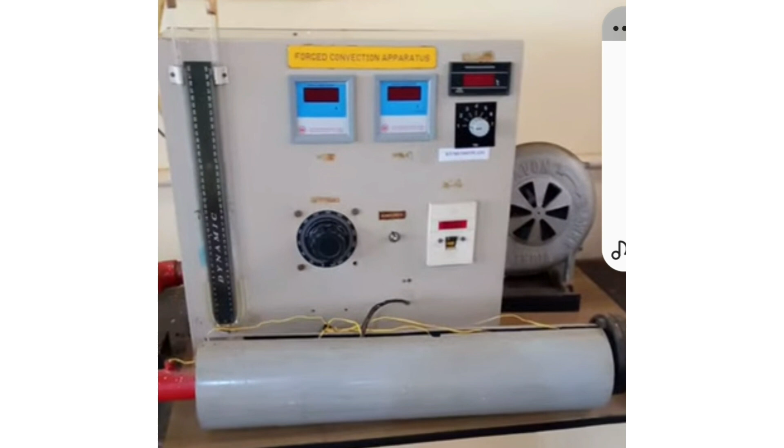Forced convection apparatus. In the previous class, we conducted the free convection experiment and found the heat transfer coefficient value in the case of free convection. So here, we are going to find out the heat transfer coefficient in forced convection, where the fluid flows through a pipe. So the aim is to determine the heat transfer coefficient in forced convection, fluid flow through a pipe. Okay.

To conduct this experiment, first we are going to see the specification. Diameter of the orifice is 0.02 meter, test section length of the pipe is 0.5 meter, diameter of the pipe is 0.032 meter, coefficient of discharge 0.64, there is no unit. Dimmerstat range is 260 volt and 2 ampere, voltmeter maximum is 300 volt, ammeter maximum is 2 ampere, and the number of thermocouples is 7.

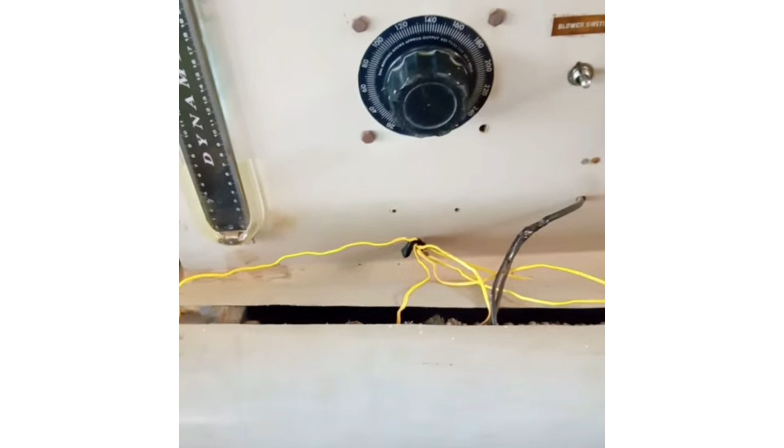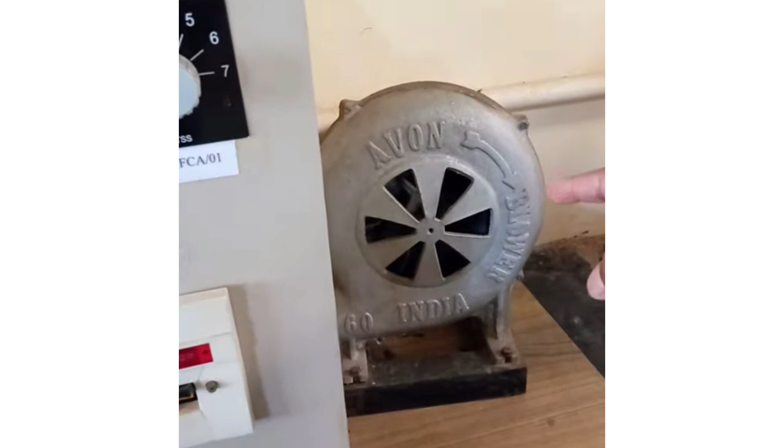If you come to the setup, we are going to consider a horizontal pipe. Inside of this pipe the fluid is flowing. If you come near, you can observe. This is the test pipe. As we consider forced convection, we use an external agency to get forced air over the heated surface area, that is a blower. From this blower we get forced air, which circulates inside of this test pipe. This is the test section.

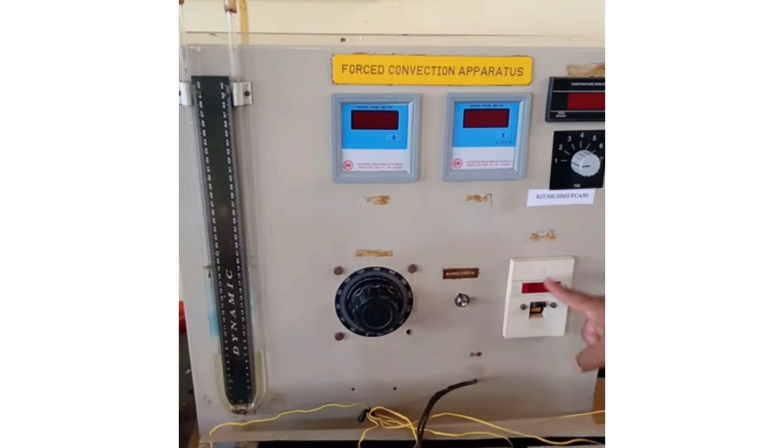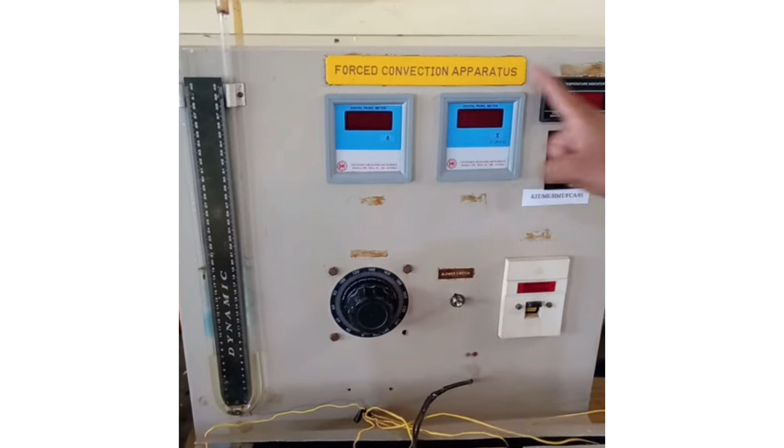If we come to the control panel, we can observe this is the power switch, this is the blower switch, this is the dimmerstat voltage controller. This is a voltmeter, this is an ammeter. This is a temperature indicator; operating this temperature knob we can observe the temperatures. This is a U-tube manometer. We can note down the readings H1 and H2 from this U-tube manometer.

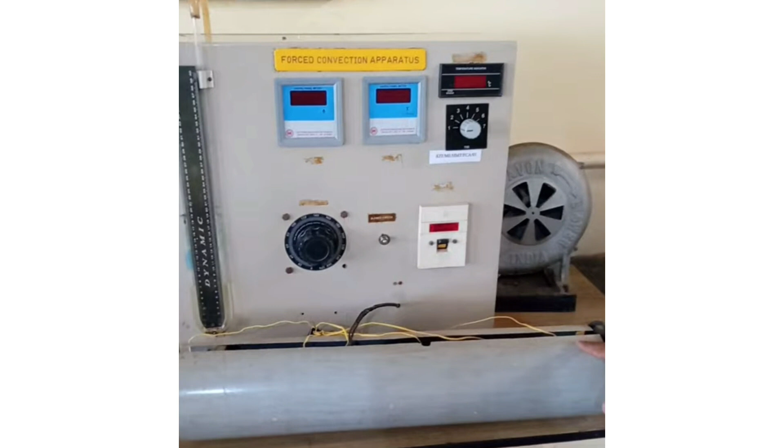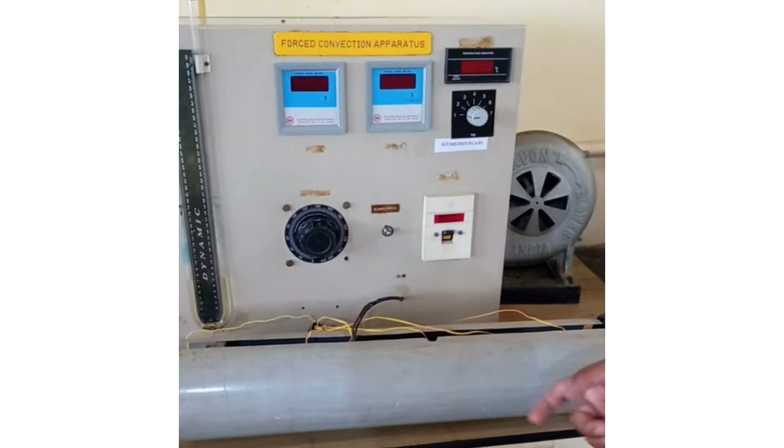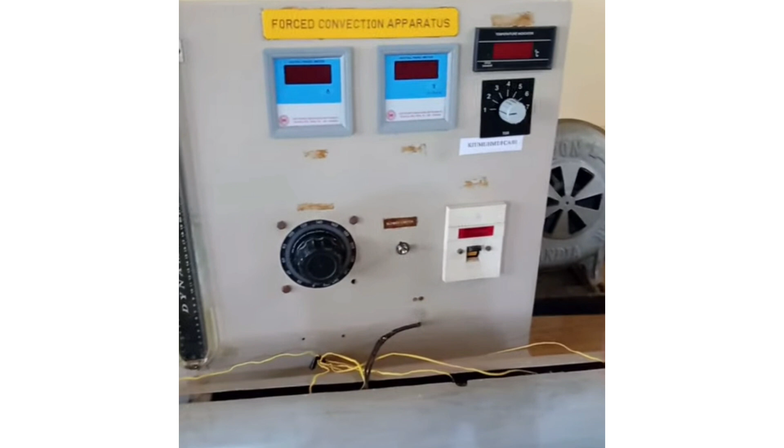So here we can observe this is the blower, from which we get the forced air. This is the length of the horizontal pipe. For this pipe we consider a heating coil, therefore the tube is heated, and the air is also heated when it circulates inside the pipe. To measure the surface temperature of the pipe, around 5 thermocouples are placed over the surface of the pipe. These are all the thermocouple wires.

Before the fluid enters the test pipe, we consider 1 thermocouple, and after the test pipe, 1 more thermocouple. For our reference, this we consider as T1, the fluid entering temperature, and this we say is the fluid exit temperature. The remaining temperatures are the surface temperatures of the pipe. Okay.

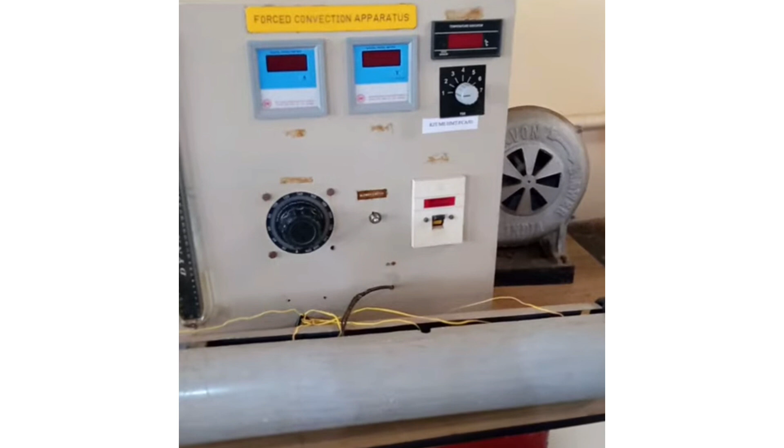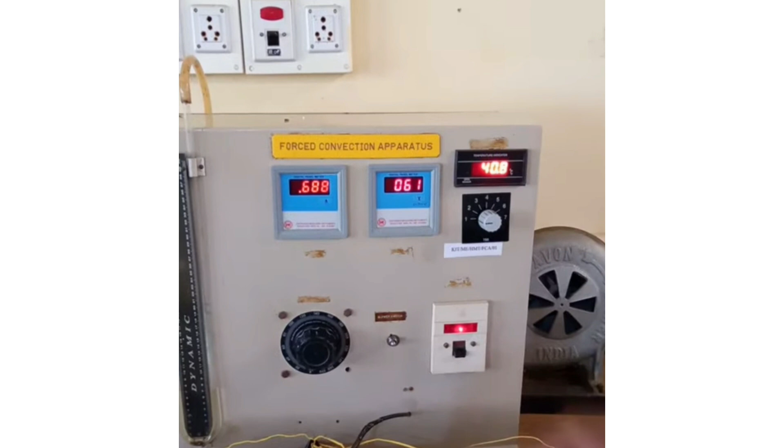Initially we switch on the mains. After switching on, we set the voltage by operating this voltage controller. We already set 60 volt. Based on the voltage, it shows the current reading. As the voltage is set, heat is supplied to this pipe. To avoid heat interaction with the surroundings, we provide insulation; we place cotton thread to avoid heat interaction with the surroundings.

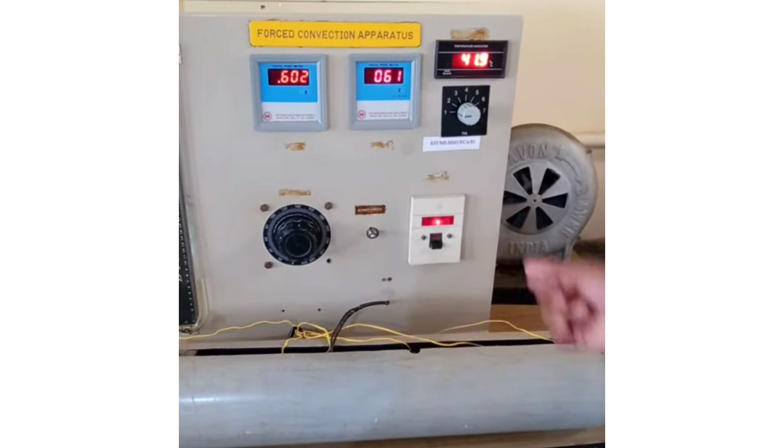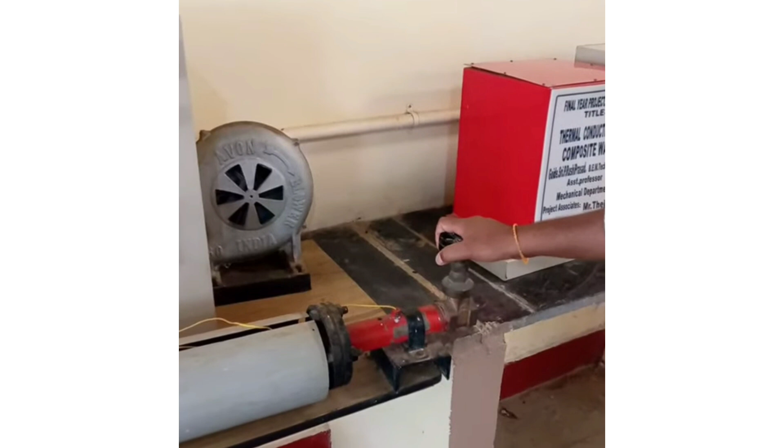So next thing is, we are going to switch on the blower. Before switching on the blower, you just adjust the valve. You just consider different trials. For the first trial, you just consider it as fully open. Next is partially open, 50% open, 25% open. Like that, we can consider different sets of trials. For the first trial, you just consider this valve fully open.

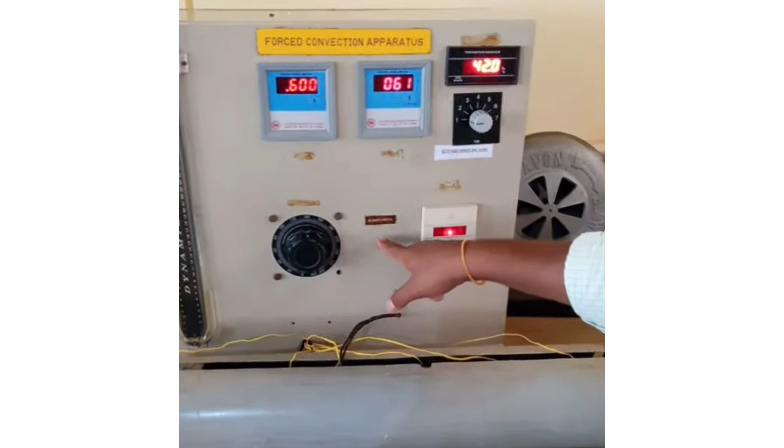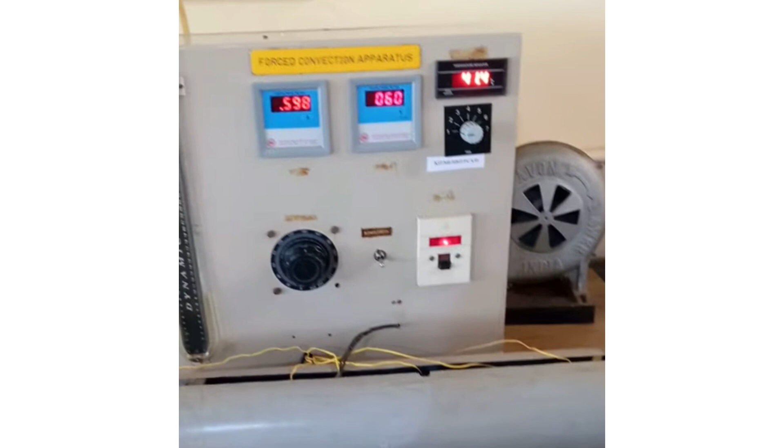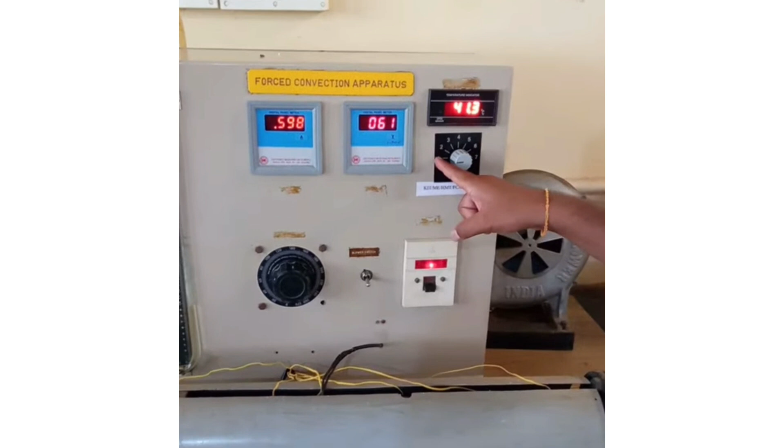Next, you switch on the blower. When you switch on the blower, from the blower we will get the forced air, and the forced air is circulated inside the pipe. Next, we are going to note down the temperatures. When the temperature reaches steady state, we are going to observe the temperatures T1 and T7, which indicate the fluid entering temperature and fluid exit temperature. T2 to T6 represent the surface temperature.

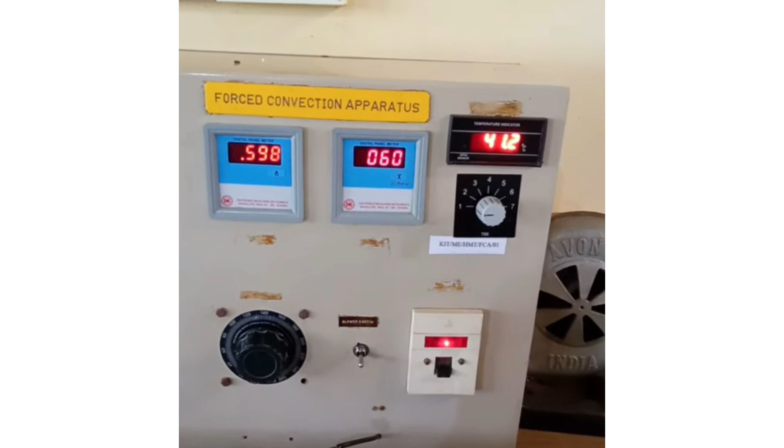So you are going to wait to reach the steady state. Steady state means temperature does not vary with respect to time. During that time, you are going to note down the temperatures. T1, that is the fluid entering temperature. T2, surface temperature. T3, surface temperature. T4, surface temperature, at different positions. At uniform distance we place the thermocouples to measure surface temperature. T4, T5, T6, and T7.

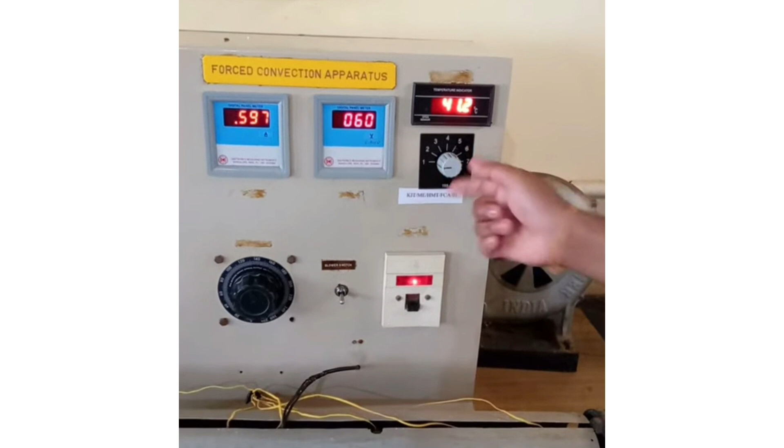T7, it says what? One second. T7 is the fluid exit temperature. The fluid exit temperature is more than the fluid entering temperature, because the fluid catches the heat from the tube, the heated surface. Therefore, at the exit point, we get the maximum temperature. As we can observe, T7 is 46. If you observe T1, what is T1? 41. Compared to T7, T1 is less, because the fluid carries heat from the heated surface area.

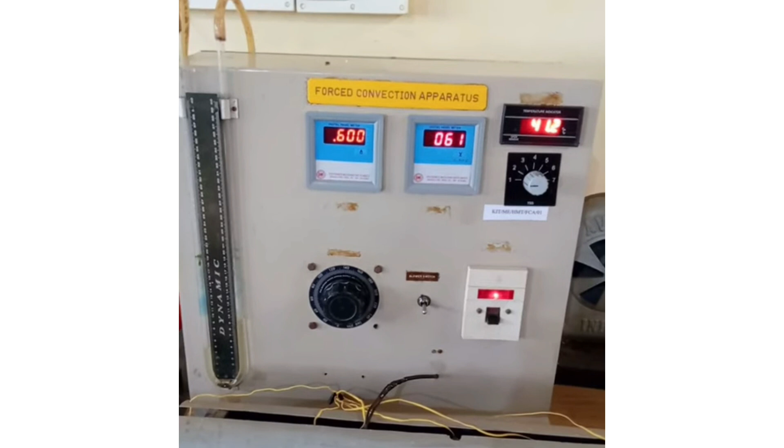From the tube. After noting down the voltage, current and temperatures, you are going to note down the H1 and H2 values. Observe the left limb and right limb. You note down H1 and H2 to find out the velocity of the air. From that velocity of air, we can find the Reynolds number. From the Reynolds number, we can decide the type of flow. Based on the Nusselt equation, we can find the heat transfer coefficient. The h value, theoretical and experimental, we can find out.

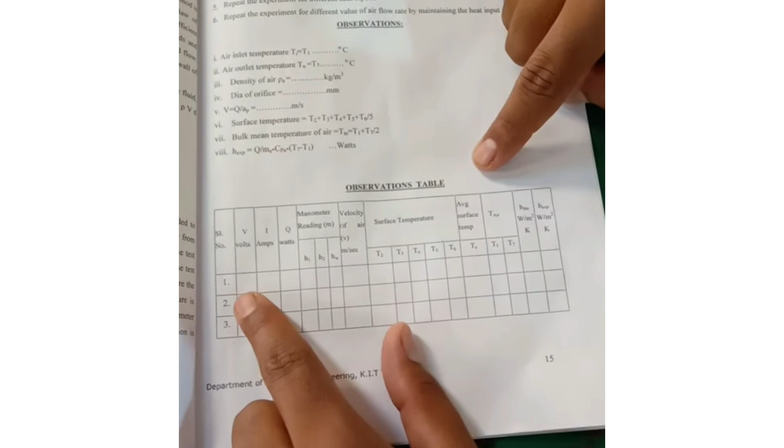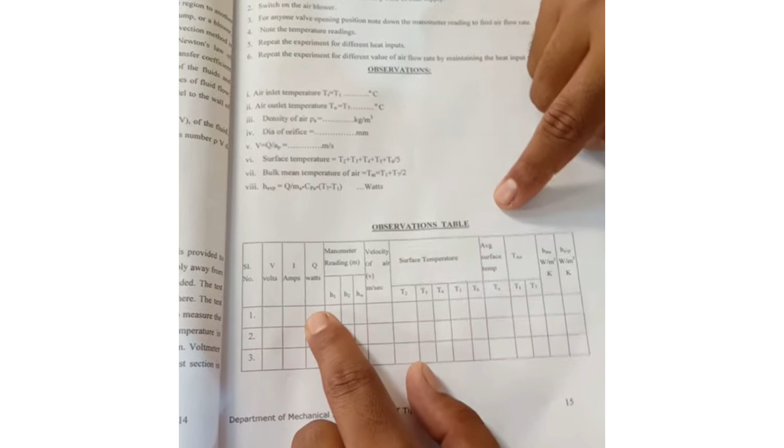This is the observation table. You just note down the voltage. As we set the voltage around 60 volts, based on the voltage it shows the current reading. Based on this, we get the amount of heat supplied. After setting the voltage, you wait to reach the steady state. Consider forced air: when you switch on the blower, you get the forced air, which is circulated inside the pipe.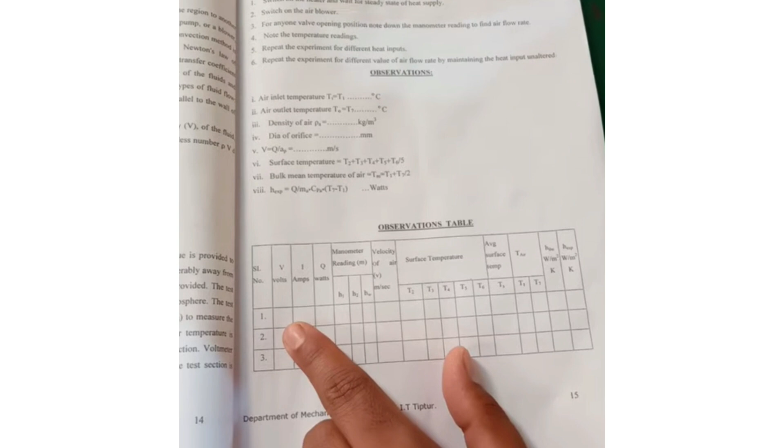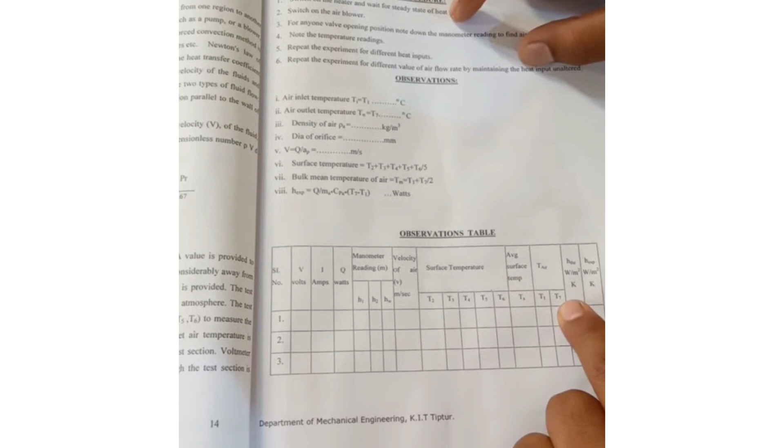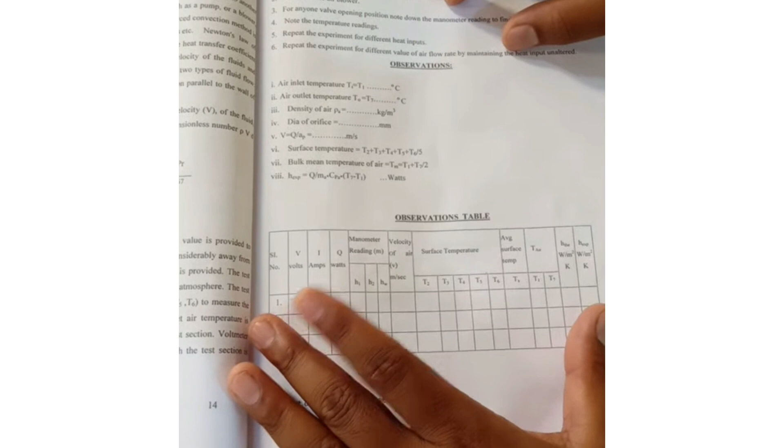After that, you note down the surface temperatures, the fluid entering temperature T1, and the fluid exit temperature T7. From the surface temperatures, we find the average surface temperature, and you note down the manometer readings to find the velocity of air. By knowing all these values, we can find the theoretical heat transfer coefficient and experimental heat transfer coefficient.

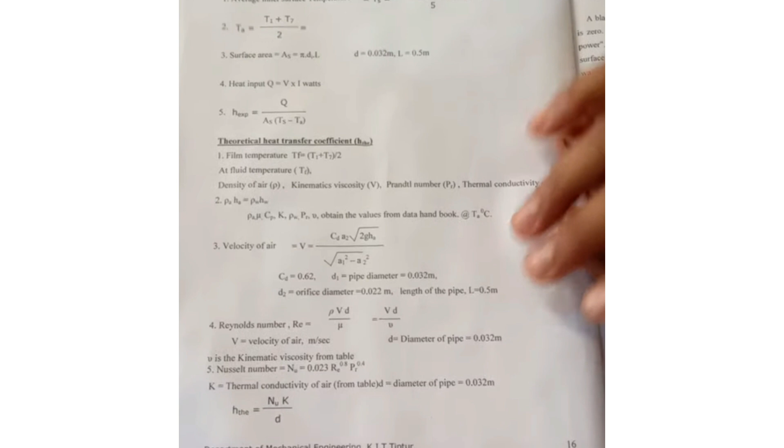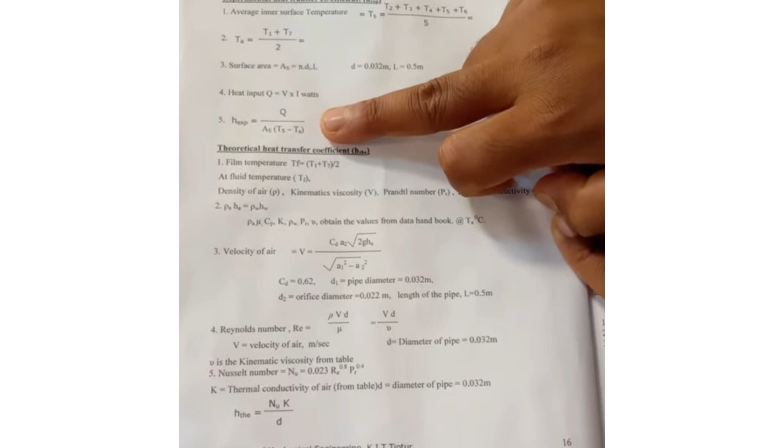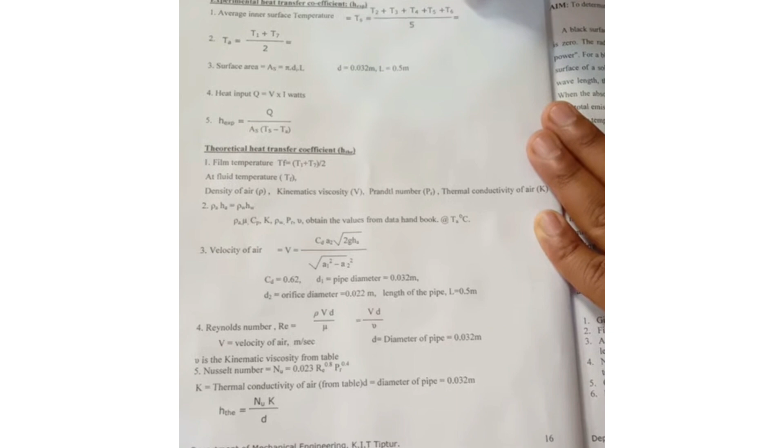Next is the calculation procedure. These are some important formulas to find the heat transfer coefficient, the experimental value and theoretical value. To find the heat transfer coefficient experimentally, we use the convective cooling law equation, Q = hAΔT. Using this equation, we can find the experimental h value. As we know the surface temperatures, we can take the average.

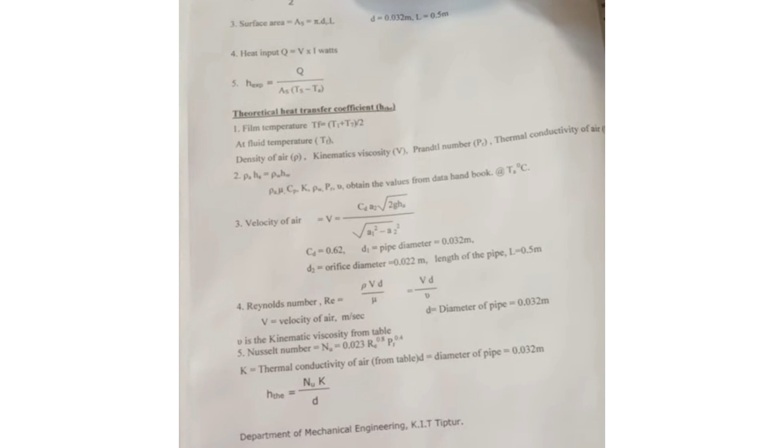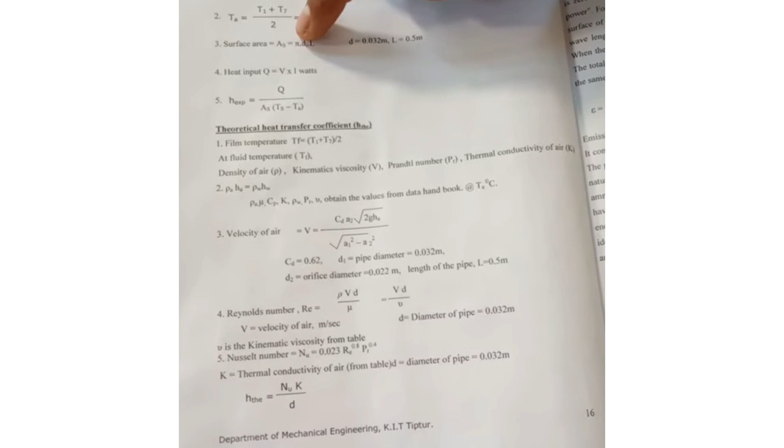Okay, from that we can get the fluid temperature. We are going to take the average of the fluid entering and fluid exit temperatures divided by 2. From this, we will get the difference in temperature, and we are going to find out the surface area of the tube or pipe, right? We are going to consider the formula pi DL, or we can consider 2 pi RL. As we know the diameter and the length, we can easily find out the area.

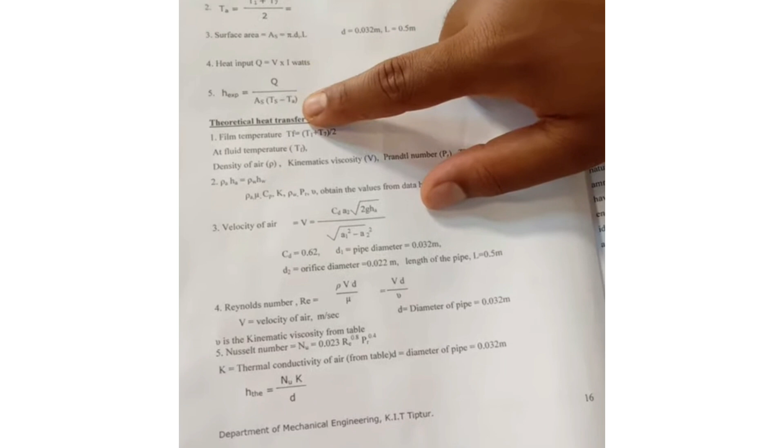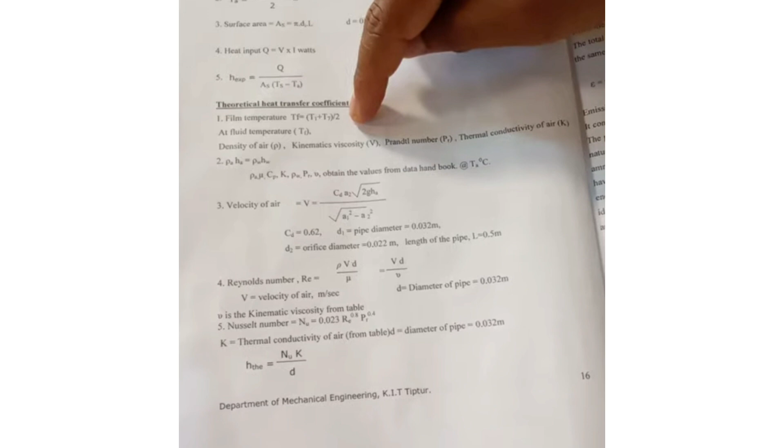As we can find out the amount of heat supplied, from this we can find out the H experimental value. If we come to the theoretical, we are going to find out the film temperature. After finding out the film temperature, we are going to note down the properties and values for that particular temperature using the data handbook. From your data handbook, you can find out the properties of the fluid, that is air, for the particular temperature: the density, kinematic viscosity, Prandtl number, and thermal conductivity value.

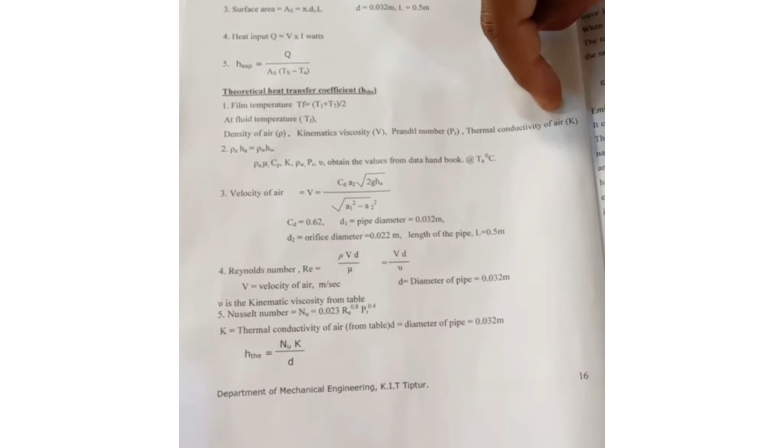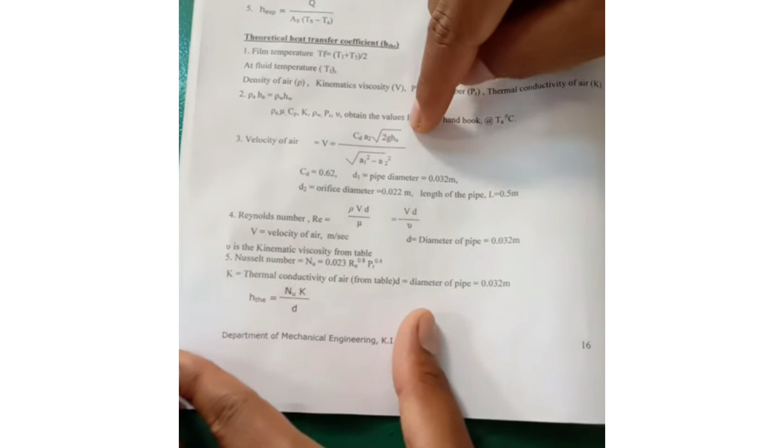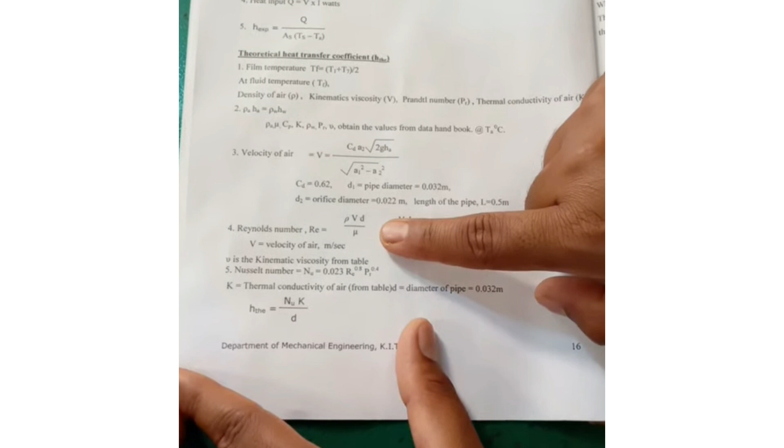After knowing these values, we are going to consider the velocity of air, as we already noted down the manometer reading, right? By consideration of this equation, we are going to find out the velocity of air. As we find out the velocity of air, we can find out the Reynolds number, right? As we know, Reynolds number is the ratio of inertial force divided by viscous force. We are going to consider the mathematical expression rho Vd by mu or Vd by nu, right? By consideration of these, we are going to find out the Reynolds number.

As we know, there is one generalized equation when the fluid is flowing inside a horizontal pipe; we are going to consider this Nusselt expression. Nusselt is equal to 0.023 Reynolds to the power of 0.8 and Prandtl to the power of 0.4. As we find out the Reynolds value, we know the Prandtl number from the data handbook.

By finding out the Nusselt value, we are going to consider the Nusselt expression, right? The Nusselt expression is what? HD by K. When the fluid flows over the plate, we are going to consider HL by K. When the fluid is flowing inside the pipe, we are going to consider HD by K. By consideration of this Nusselt equation, we can find out the theoretical heat transfer coefficient value.

Okay. For your reference, I will consider one trial. So as we set the voltage to 90 volts, we got a current reading of 0.89. From this, we are going to find the amount of heat supplied to the pipe. Next, once the temperature reaches steady state, we get these surface temperatures: 60, 70, 72, 71, 64. So somewhat the temperatures are uniform, right? We are going to take the average of the fluid entering temperature and fluid exit temperature, and we are going to note down the manometer readings, that is the left limb and right limb.

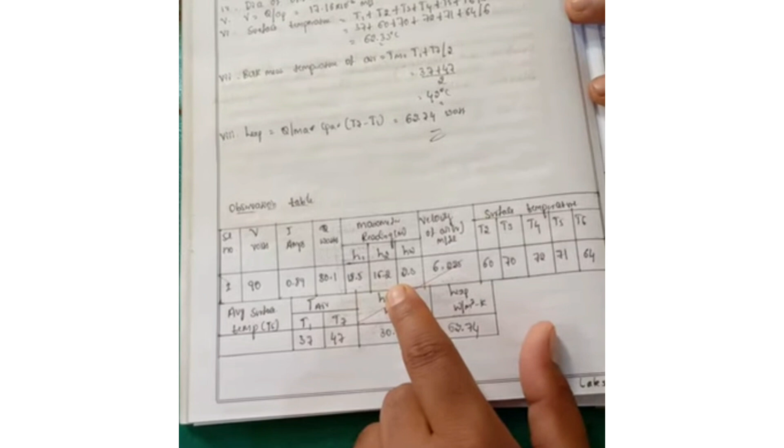Okay, from these values, we are going to find the velocity of air, right? And we are going to find the H experimental value by considering Newton's convective equation. We got around 62 watt per meter square degree Celsius. The unit is watt per meter square degree Celsius for heat transfer coefficient, right?

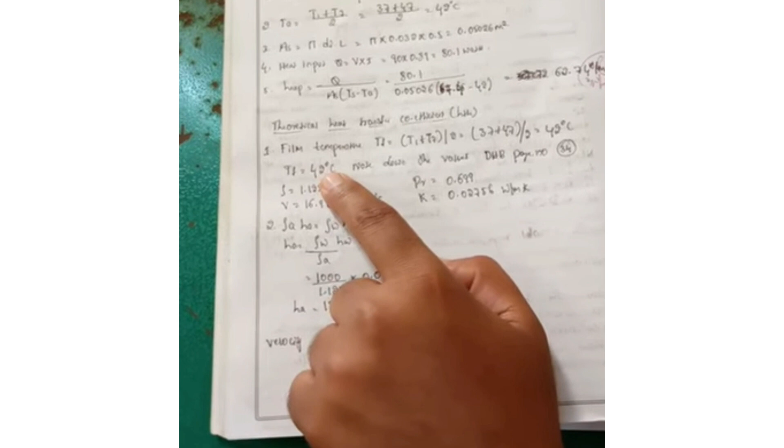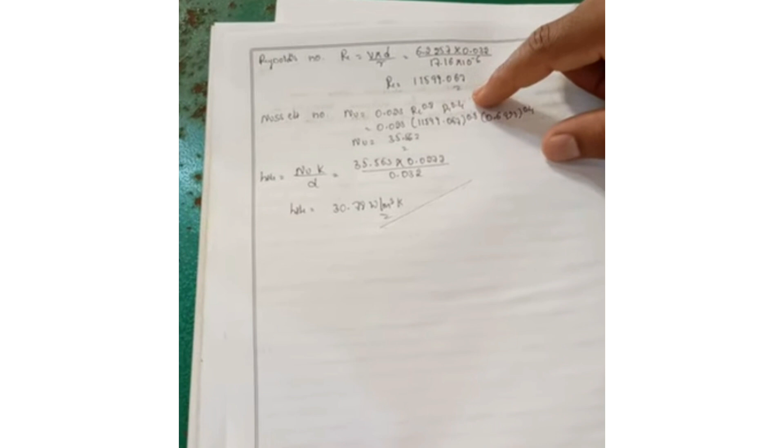And we are going to consider the film temperature to find out the theoretical heat transfer coefficient, which is 42 degree Celsius. For this particular temperature, we are going to note the properties of air from your data handbook. Next, you are going to find out the velocity of air. We are going to find out the Reynolds number. Based on the Reynolds number ranges, we are going to consider the Nusselt equation. From this Nusselt equation, we are going to find out the theoretical heat transfer coefficient value.